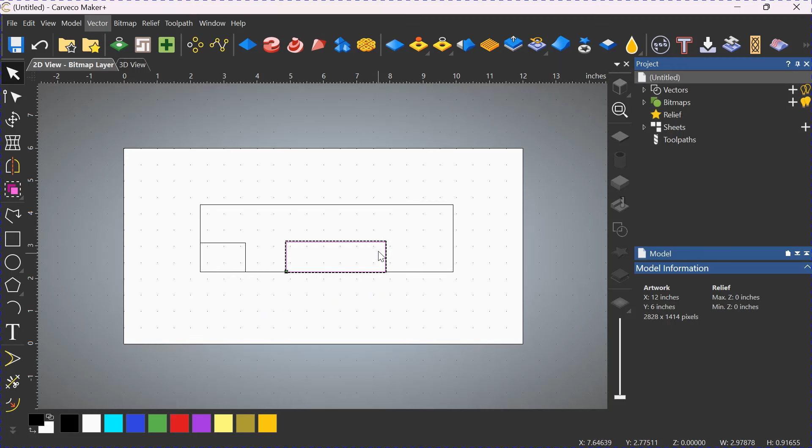Let's make another square, create that one, and let's make another square and create that one. Now these two should be exactly the same, but for the sake of simplicity, I'm not going to worry about it. Click Create. Go to the cursor tool. We can grab this one and slide it up here to the corner and release. We can grab this one, grab it in the middle, and slide it up and release. Now ideally these guys would be lined up perfectly on the bottom and they would be exactly the same height, so you have the center notch that's the same as this overhanging notch.

Use your software and create your tool paths, cut them out, and you're good to go. If you're looking for a more in-depth tutorial, I'll stick that on the back end of this video, so stay tuned after the video to check out the tutorial. But let's get back out to the shop that is a shop and continue.

Now I put that underneath there so that when I cut through I don't wreck my wasteboard. Here's a quick shot of a 30-degree V-bit for you.

So to cut these things out, you're going to want to use an O-flute bit. Cadence Manufacturing makes this one right here, and it works excellent - good for removing chips, cuts like butter.

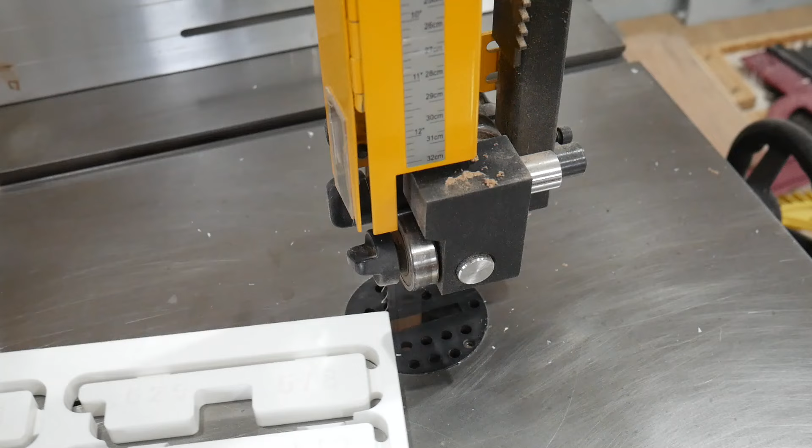Alright, just in case I didn't say it inside, I strategically put these tabs in here. That way I know that this and this and this have not been affected by me messing around cleaning things up. Put the tabs on the high side where it doesn't matter. Then you can clean them with a flush trim bit.

And as you can see, it makes these fine chips, not dust. So cleanup is a breeze.

Alright, how do we use these things? So the center notch is for height adjustment, obviously. You can bring your blades up to the bottom of that. On an older saw, you have to move the blade around to make sure you've got the right depth. You use the outside edge for overhang like that. If it was a router and you were putting it up against a fence, you'd use that.

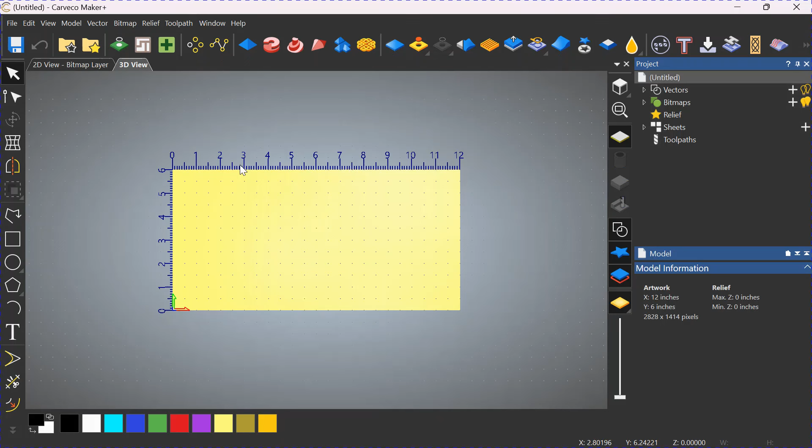Now Carveco opens up into the 3D view. We're going to work in the 2D view to do this project. And there we have the 2D view. I clicked up here on these two tabs to switch between the two views.

Now the project that I had out in the shop, I had multiples on there for all the different sizes. We're not going to bother doing that in this case, I want to keep it simple for you. So we're going to make one single setup block.

So go to the square tool here on the left, click that, then left click and drag out. It doesn't matter how wide or how high you drag this, we're going to change it over here. We're going to make this thing a 6-inch wide setup block, 1-inch high. And we're going to click create down here on the bottom. That puts the rectangle on your project, your work surface here.

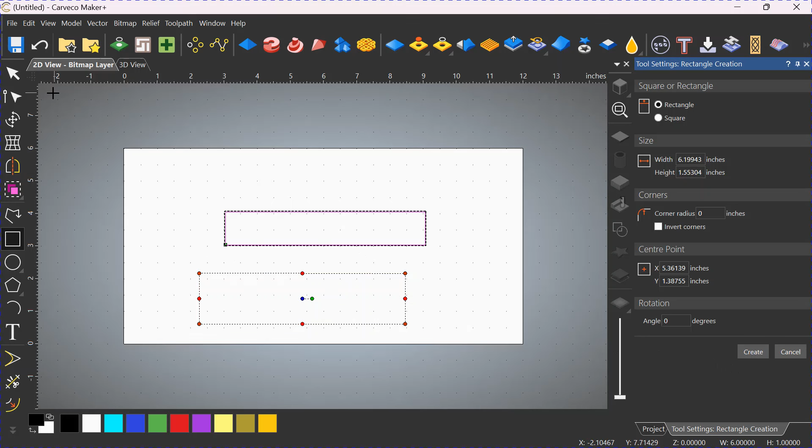If you made a square like this, drug it out, and did not hit create, when you go back to the cursor tool on top, the square will disappear. So always remember to hit create. All right, so we have our square.

Let's make that active one more time and push F9 to put it in the center. Now what I'm going to do is, let's choose a size. Let's say we wanted to make a block that was a 1/2-inch setup block.

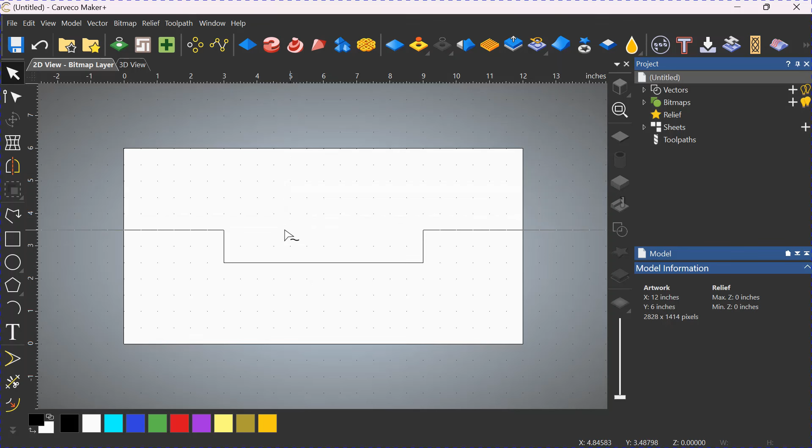I'm going to go up here on the top, left click and drag in a guideline. I'm going to drag it to the bottom until I get that symbol on my screen. I'm going to release. When I get the double arrow here, I'm going to move over. When I get the double arrow, I'm going to right click, go down here to Edit Guideline.

This screen will pop up. I'm going to go down here to Insert Guidelines. I'm going to insert a guideline at a 1/2 inch, 0.5. Now, I want that guideline inserted relative to this line, so we're going to click Relative Offset, and hit Insert. As you can see, it puts another guideline in up here. Now, say I wanted to put a guideline below the box, I would put a negative here, negative 0.5, click Insert, and it would drop a guideline on the bottom.

Obviously, we're not doing that. Closing this out. You saw that I had a cutout here on the bottom.

Easily done as well. Let's drag this over and look for center. When you get that symbol, you're in the center. So that your bit will fit up in there, you can make this gouge or recess any width you want. I'll come up here to the double arrow again, right click, edit the guideline once more. Again, this is going to be a relative offset.

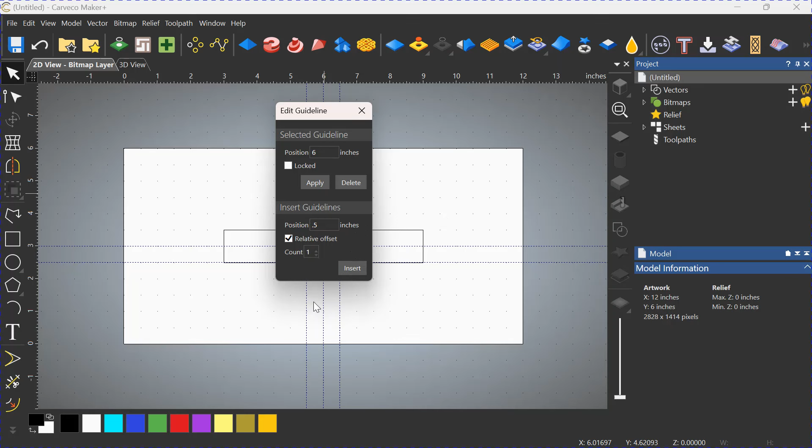Let's make this notch in the bottom of this thing, let's go 1 inch wide. So I'm going to go negative 0.5 and insert. Then I'm going to remove the negative sign, and go positive 0.5 and insert. That just gave me a 1 inch gap here on the left and right. We can close out this menu.

So now we have the makings of our 1 inch by 1/2 inch recess. That's the notch, so we can slide this thing over top of our tools. Let's put one over here so that we can slide this into the edge of something that may have a fence that's going to obstruct and not allow us to use the center portion. That's why that notch is cut on this side.

Same thing. Let's drag in a guideline till we get that symbol and release. Double arrow, right click, edit the guideline, relative offset. Let's go in roughly, 3/4 of an inch.

Again, we want to have enough room to put this thing against our bit and our fence, and still have enough room for the radius that the 1/4 inch bit is going to cause on the corner when it switches here. I'll insert this and close this.

By the radius I mean when your round shaped bit goes into this corner, this will never be a sharp corner. So you want to leave enough room so that when that bit goes around the corner like this, you still have a nice flat area right here to use as your setup depth.

All right, so there's the makings of the cutouts. Well, how do we cut it out?

Pretty easy. Go over here to the line tool, create polyline, left click that, start on this corner. When we get the window, we'll left click, let go of the button and go up till we get that symbol, left click again, across till we get the crosshair, left click, down till we get the crosshair with a dot, and left click. Now when we stretch out, we can see that we have a line following us.

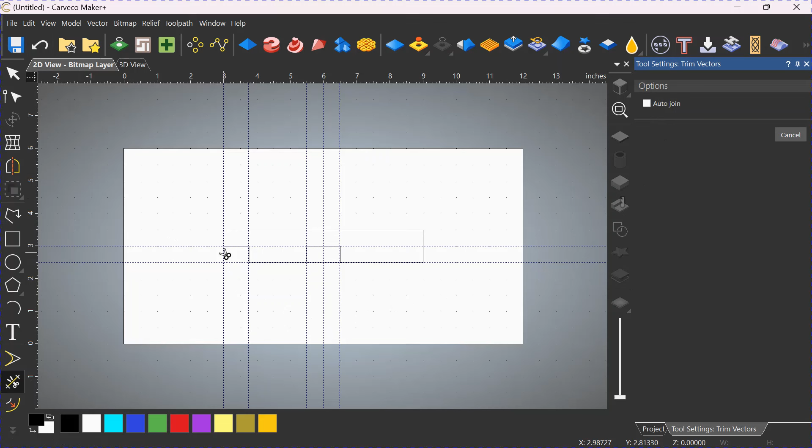Oops, we don't want it to do that. So let's undo here. Let's undo the auto join, and let's remove it now here and here. We're going to do it here again to remove the bottom.

Now we're going to go to the cursor and click on that. Let's go up to the view, all the way down to delete guidelines. They're gone. We need to remove that one last little leg here. That is gone.

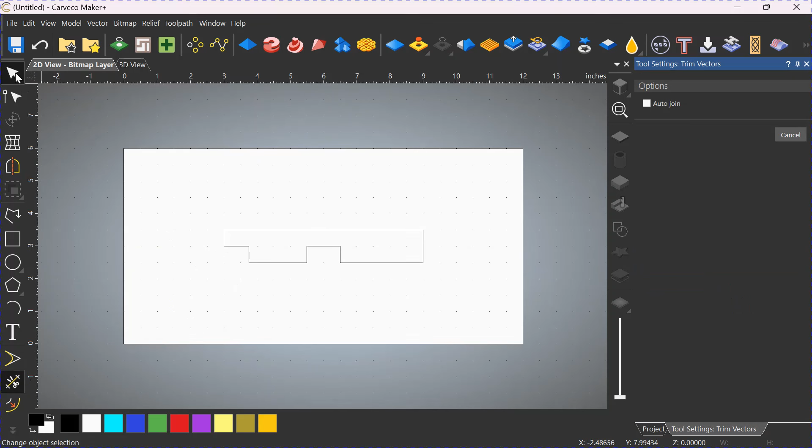Let's go to the cursor once more. Highlight everything. Going to go back up here to vector. Going to go down here to join. We're going to join with coincident nodes. Over here to 0.1 for a tolerance, and we're going to join. And now we have a single vector all the way around.

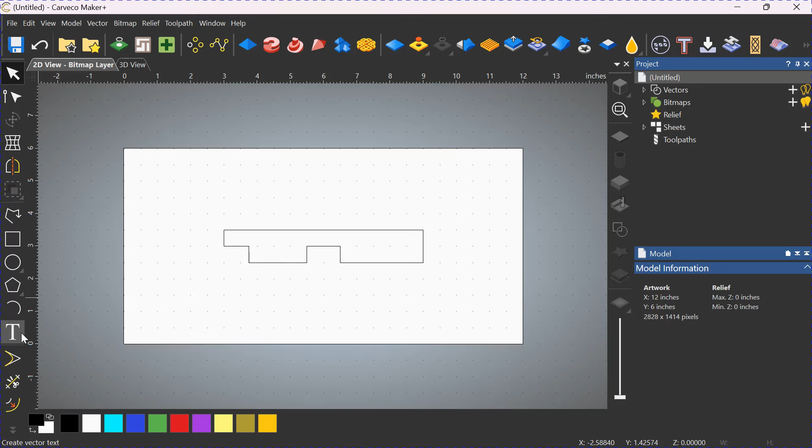And then you would just do normal tool pathing to cut that shape out. But let's say we wanted to put in the numbers of what this thing is. That's easy. Let's go to the text tool over here, the T. We're going to click inside the shape, and we said this was a 1/2 inch, so let's do 0.5.

Go over here to the side and scroll down to where it says create. We're going to click on create there. Let's put 1/2 inch on this side, for those of us that don't know what 0.5 is. I know that's silliness, but let's put that in here.

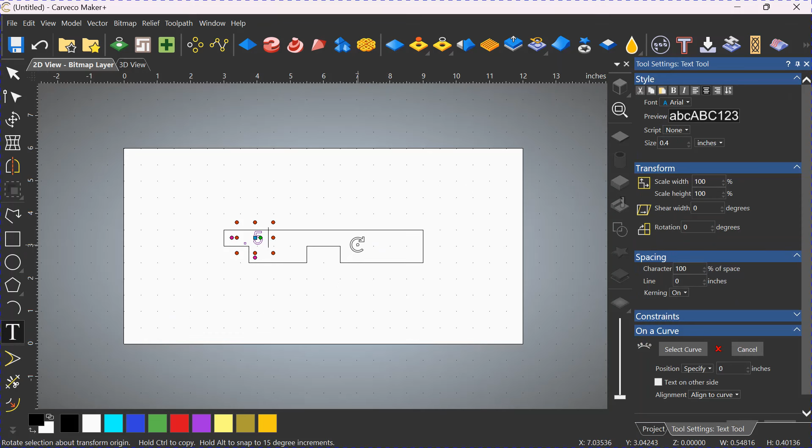Go to the cursor tool and deactivate the text, or it will continue to try and work with this text. So we deactivated it with the cursor tool. Then we go to the text tool, and we can start again by entering it here: 1/2 inch.

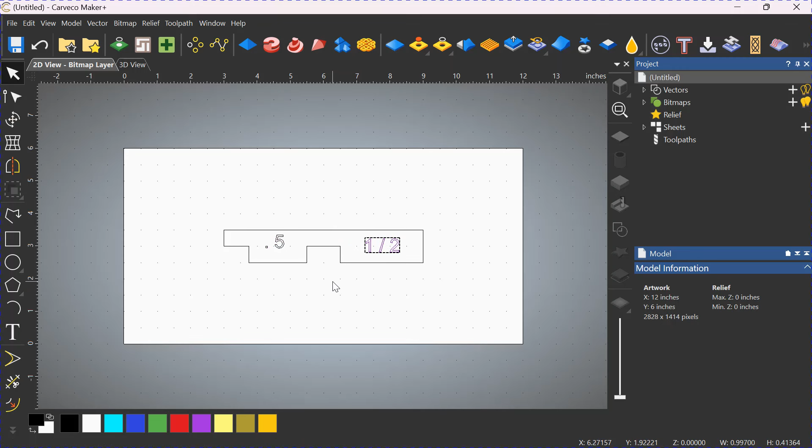Again, we need to create. So now we have both of those indicators. We need to move them into position, so highlight them, grab, drag to where you want the thing and release. I'm dragging with the left mouse button. Again, highlighting the 1/2 inch, dragging and releasing. Now we have those where we want them, but they don't look nice.

They're not in line, so let's click on that one. We'll click, push shift, and click on this one. Right click, and click on or drag to align vectors. We'll get a fly-out menu. Then we're going to go down and click to align to the top. That places them along the same plane all the way across.

Now, with them both highlighted, we can move them together so they're a little more in the center. That looks pretty good right there. We could also push F9 to ensure that they're in the center and release. Now I don't like the way that looks. It looks like it's too far over this way, so I'm going to select them both and move it back to where I had it, because I think that just looks better to the eye.

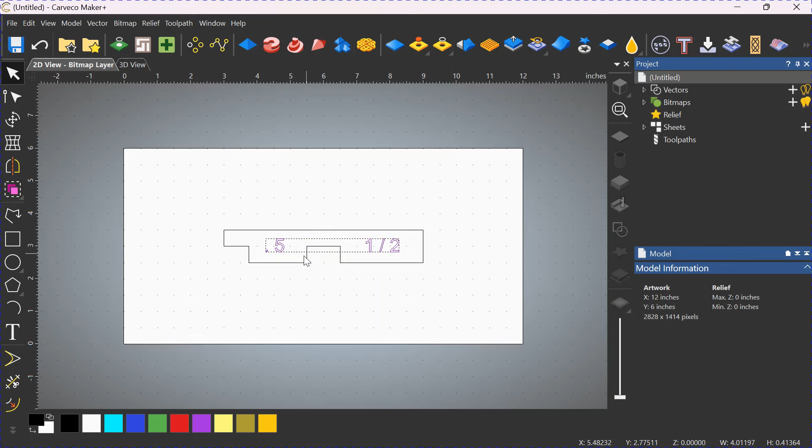We're going to click off of them to deactivate them. Now we're going to do some simple tool paths quickly. We're going to click on the 1/2 inch, push shift, click on the 5. Let's group them by going over here and clicking on group. What that does is make it so they will both highlight - I don't have to push shift anymore.

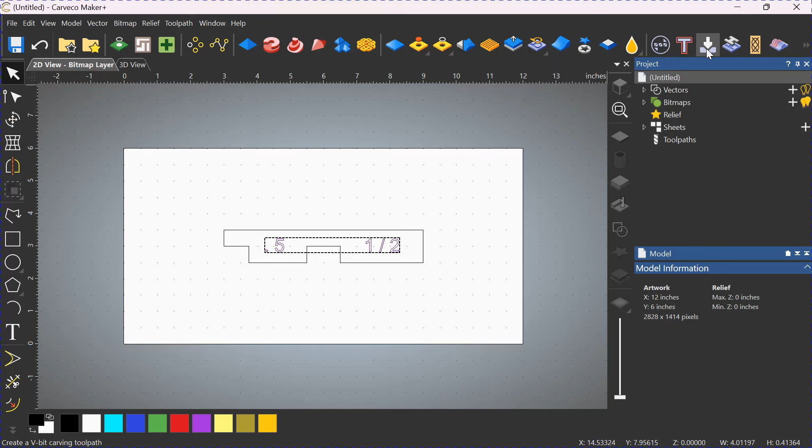Activate them both, go up here to V-bit toolpath or V-bit carving. Dropping down, start depth is 0. I'm going to limit the maximum depth with this, limit tool depth to 0.125. I'm going to select a tool here - I'm going to use a 30-degree V-bit to do this. Push select, scrolling down, I don't need a roughing tool because that's going to be such a narrow thing. You're never going to get an end mill in there anyway.

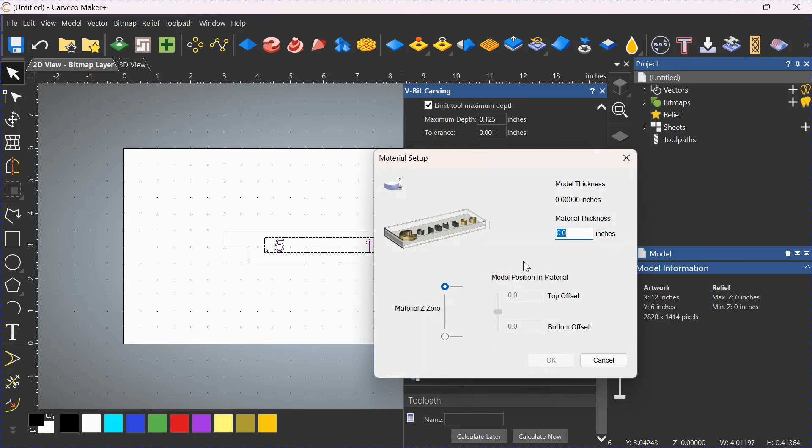We're going to click to define the material. In this case, the material is a 1/2 inch. We're going to click OK. Going to give it a name - let's call it numbers. Let's go and learn how to spell here - numbers. And we're going to calculate. So as you can see, it's going to carve our numbers out for us. We're going to close this menu.

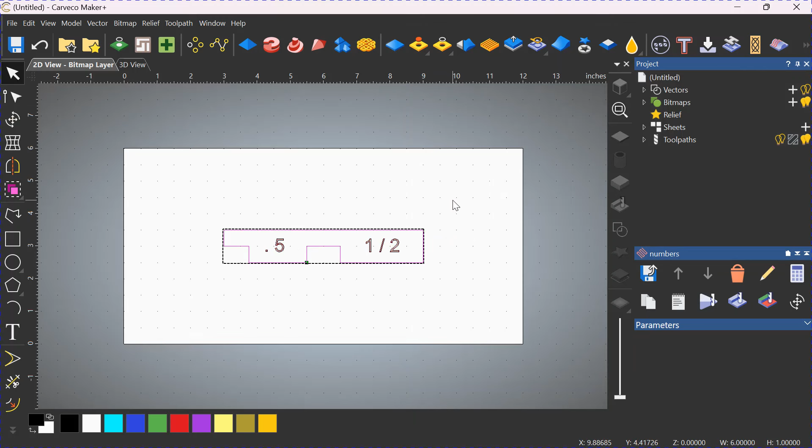Now we're going to click off and click on the outside perimeter. We're going to go to a profile toolpath, very quickly. Start depth is 0, finish depth is 0.5. For the profiling tool, we're going to use a 1/4 inch end mill - the O flute Jenny.

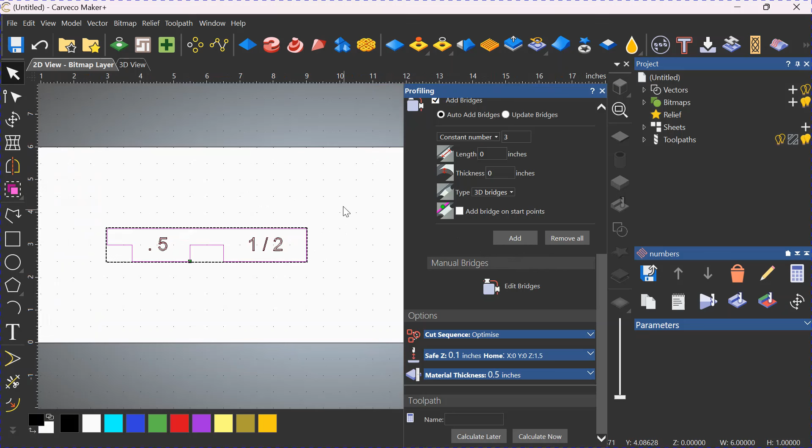Select that, scrolling down, we are going to put some bridges in. We're going to put those in strategically. Let me drag this over - I'm pushing both mouse keys and dragging to the left so that you can see, reactivating the vector. I'm going to edit bridges, and we're going to add the bridges here.

We're going to click 1/2 inch wide, 1/4 inch thick, 3D bridges, and click apply. Then we're going to strategically put these in. I don't want to put the bridges down here where it would mess up the height of this when we go to use it. If while we're cleaning up the block we get a burr or whatever here when we clean it up, we don't want that. So we'll put a bridge here on the top where it's not going to affect anything, and we'll put a bridge here on the end where it's not going to affect anything.

We'll come down here and give it a name - I always call these cut loose. Calculate now, and that's all there is to it.